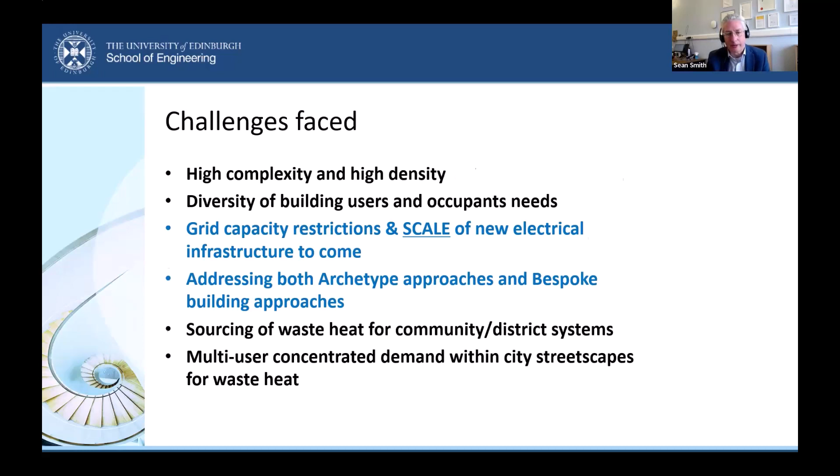There are further issues coming down the line in terms of the acceptance and accreditation of novel solutions. As we look at our buildings and estates, there are new types of fabric insulations and new heating technologies coming, and of course these have to be piloted first, but then they have to be accepted and accredited. So the timelines for those can also impact on how quickly we may wish to put in a new solution.

The historic and listed status of many buildings across the UK—none more so than the University of Edinburgh, which has 580 buildings, representing 25% of the entire Scottish university estate, of which 495 are heated buildings and 170 are listed buildings. The retrofit investment finance, which has been in big discussion over the last 18 months to deliver these works, is still ongoing.

It'll be interesting to see how pension funds and others move forward as they invest into long-term financial models on retrofit. But we're all coupled with the same issue of the pace of CO2 reductions and our skills capacity to engage for mass retrofit delivery. I'm going to touch on that today.

So let's look at London, Edinburgh and Glasgow, three amazing cities. When we look at flatted buildings alone, London is 54%, Edinburgh 68%, and Glasgow leads the UK with the greatest proportion of flats of any city at 73%. That's when you take into account the UK average, which is roughly 21% for flats.

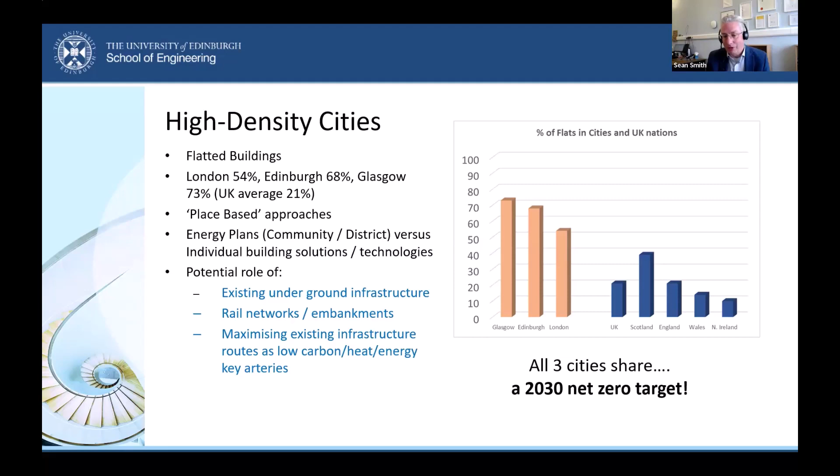And all three cities share a 2030 net zero target. So Edinburgh, Glasgow and London are sharing that very, very difficult timeline. A few months ago, back in November, I was presenting at the International Retrofit Conference, discussing the timelines both for Scotland's 2045 net zero and the UK and European 2050 net zero targets.

We often think, well, it's 22, 21 years away, we have plenty of time to 2045, or it's 27, 26 years away till 2050. And that might lead us, if we take the UK context, to think, oh, we've got plenty of time. But that's 236,700 hours roughly of work time since November of last year till November 2050.

But of course, you take away the weekends, the Friday afternoons when the construction industry doesn't work, and also the holidays, Christmas periods and everything else, and before you know it, you're down to 137,000 hours.

But then, of course, we don't work 24 hours a day. We typically work about 8 hours. Even if we take a typical 10-hour working day, with 1 hour traveling in, 8 hours work, 1 hour back, we're left with about 45,302 hours, which isn't a lot of time, equivalent to about 62 months.

But if we look at the timelines for 2030 for London, Edinburgh and Glasgow, we actually only have, if you accumulate real time available, about 1,377 days or 33,000 hours, and that's on a 24-hour clock. In reality, we have 11,000 hours by 2030, which if you packed them all together is only 459 days of full-time activity.

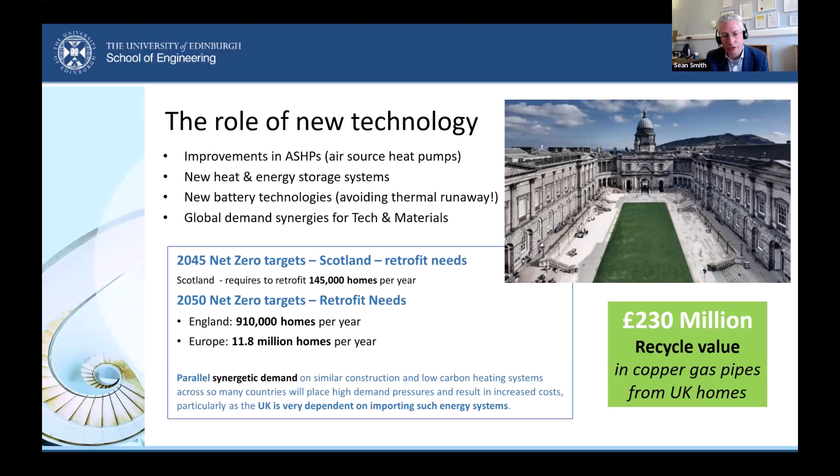There are some new technologies coming. These can be applied both to houses and to non-domestic buildings, and they can be stacked and racked. One of them is a British UK innovation called Heat Wayv, and the world's first trials of this will be coming out very soon. We'll be involved with those trials along with some other universities. It has multiple advantages over many other systems on the market.

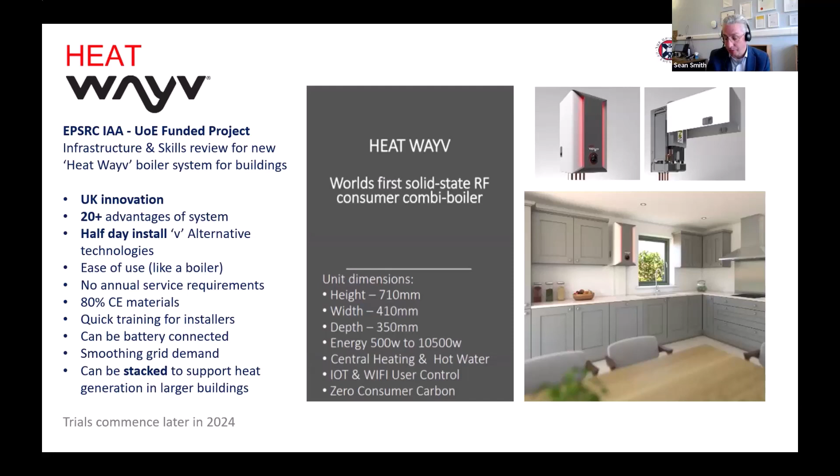It's only a half-day install. It doesn't require fabric first treatment, unlike air source heat pumps, which typically take about 4 days to install. It's very quick, with installer training available. Importantly, because you can link it with battery connections, it can help smooth grid demand—you can draw down electricity at night, which is far cheaper, and then it operates just like a normal boiler system during the day. This is a British company, and these will be coming very soon.

When we look beyond just our existing buildings, the other aspect to consider is what we're doing with any new buildings. So here we've put ourselves to the test at the University of Edinburgh, where we're building a brand new School of Engineering building.

Whilst the original conceptual designs were brought out in 2017, in 2020 and 2022 we then revamped the design to look at how we could reduce the type of materials we were using and reduce the embodied carbon—that's how much carbon was involved in the manufacture of those materials.

Importantly, what we decided to do is recognize that there are still new technologies to come for heating and also cooling. So we've built a net zero laboratory space as the building is being built live, where adjacent to the main plant room will be a space where we can test new technologies, and when the timing is right, we'll be able to switch and bring in new technology into that plant room, connecting directly to the building from that net zero laboratory.

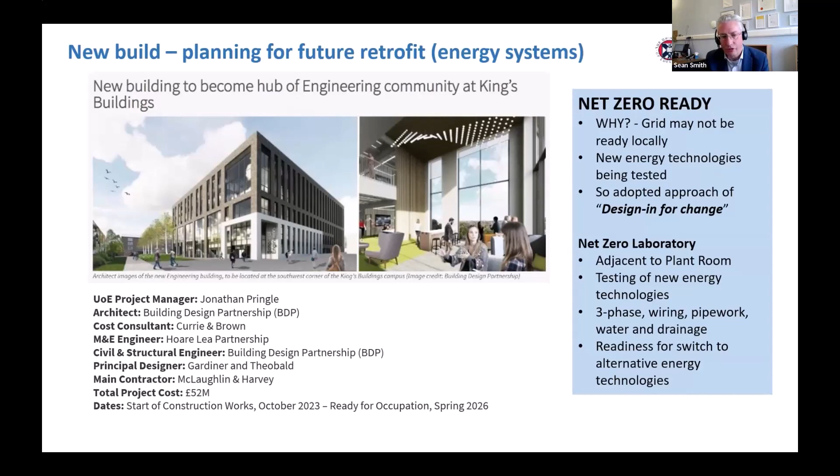So in essence, we are trying to plan for future retrofit by creating a design for change in this new building. There's a big discussion that often goes on around energy efficiency fabric, that's the thermal performance of the envelope of the building, and the amount of energy and carbon we're utilizing to actually manufacture these materials. As a result, air source heat pumps are relying more heavily on such fabric improvements.

There are new air source heat pumps coming for flatted buildings, which are going to be trialed in the UK very, very soon. But there is, we think, greater work that needs to be done on the potential sweet spot where you can limit the amount of fabric or envelope improvements you're making to your building, but still deliver the air source heat pump performance.

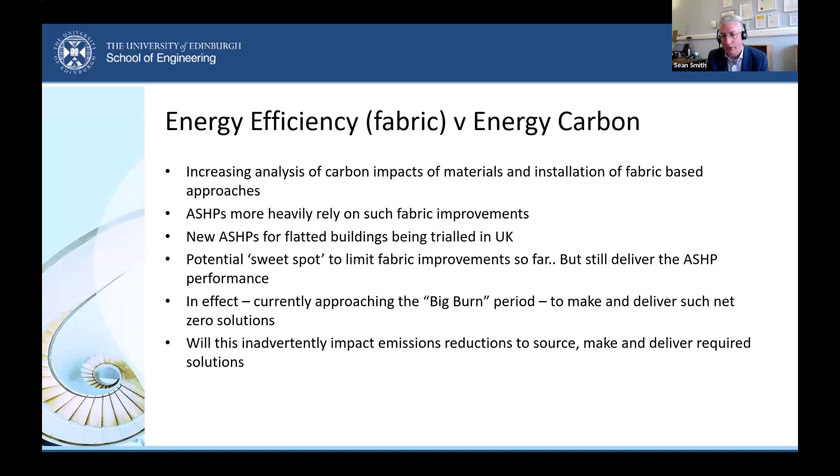If we don't take such measures and approach it in such a way, the likelihood is we will be on a big burn period, as I describe it. Our electricity is predominantly not renewable, there's still a lot of gas and other aspects utilized to create our electricity. So to make all these products and everything else, we're actually on a big burn to make them before we install them. Could that actually be counterproductive to the targets of where we're going? Some really complex issues for us all to consider.

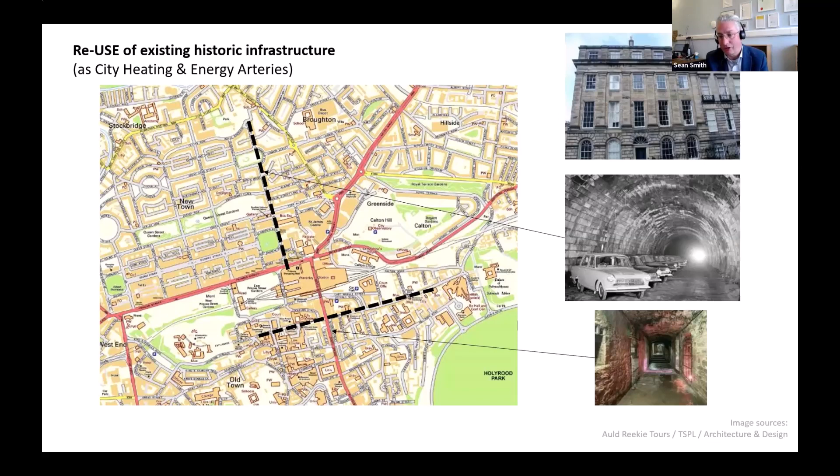And similarly, underneath the old town, there are tunnels which also haven't been used, which could be utilised and save us digging up roads and other things.

I've stolen this image from the ICE, the Institution of Civil Engineers website, but again, we've talked about, and other people have looked at, the ability to use waste heat from sewers. But not just that, perhaps there's an opportunity to also use the major sewer pipes, elements of them, where we can actually integrate district and community heating pipe networks into them, again without digging up the ground, and again accelerating that delivery of low carbon heat and network installation.

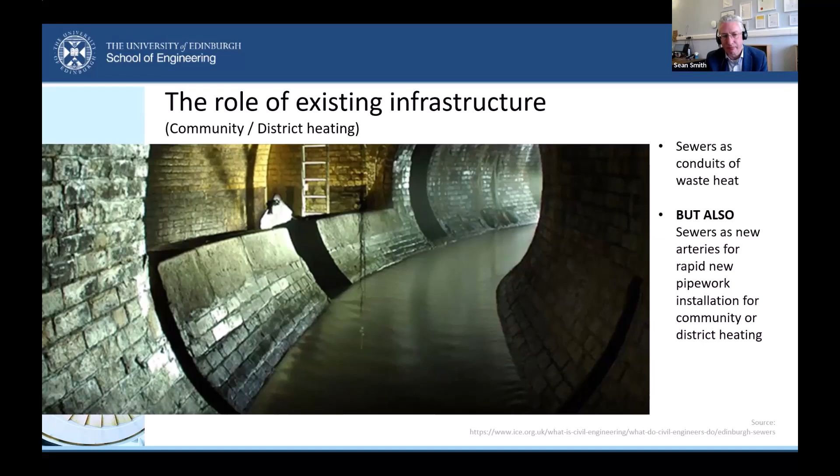I just want to finish off, if I may, on skills before I hand over to Julio. First of all, London, like the southeast of Scotland, faces major issues. It's a very fast-growing region, like London is, with population and other things. In the southeast of Scotland, we have a huge amount of workforce that we need. So when we're looking at how we're going to deliver the scale of demand that's coming, both in retrofit and net zero delivery, we worked with our local colleges to map out all current supplies of skills.

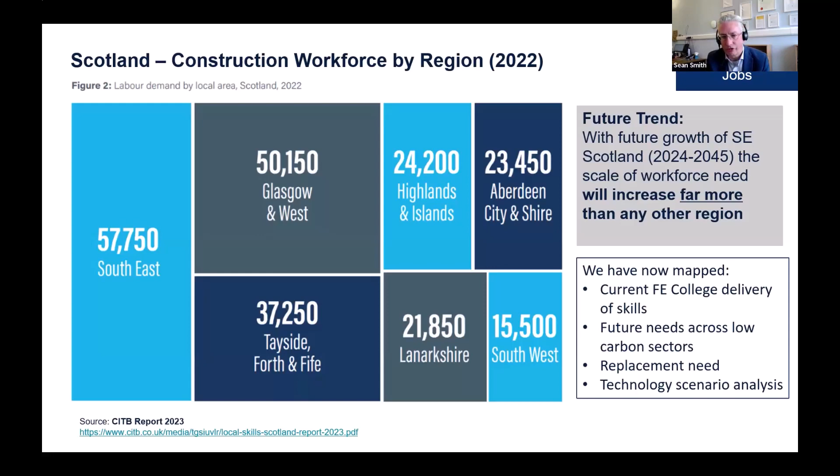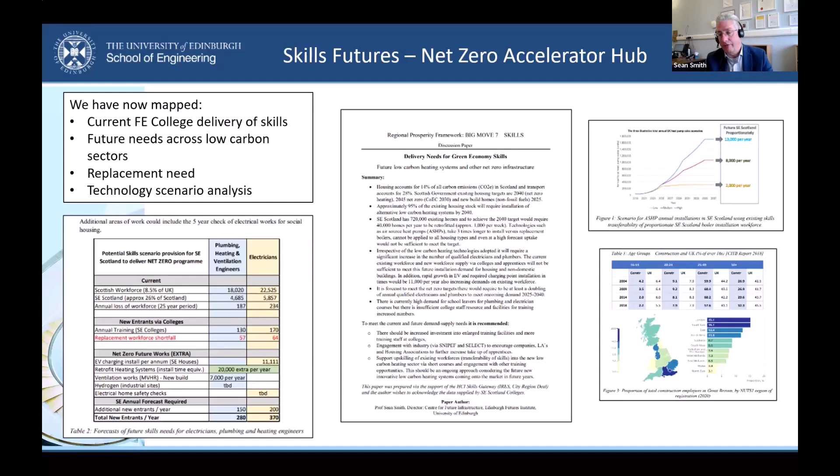What are the future needs we're going to need across the low carbon sectors on skills and workforce delivery? What is the replacement need also, as people are retiring, and running that, looking at one or two or three different technology scenarios for skills and what we would need. When we did that, it was a fascinating journey, looking at the propensity of what we would need to do. And this then formed a focus for the southeast of Scotland, and I'm sure London is doing the same, of looking at the formation of a net zero accelerator hub.

We are drawing and need the skills surrounding us. But the issue is that these other local authorities and regions, as they develop net zero, will also require to deliver their own works, and as a result will use their own workforce. So we need to replace it.

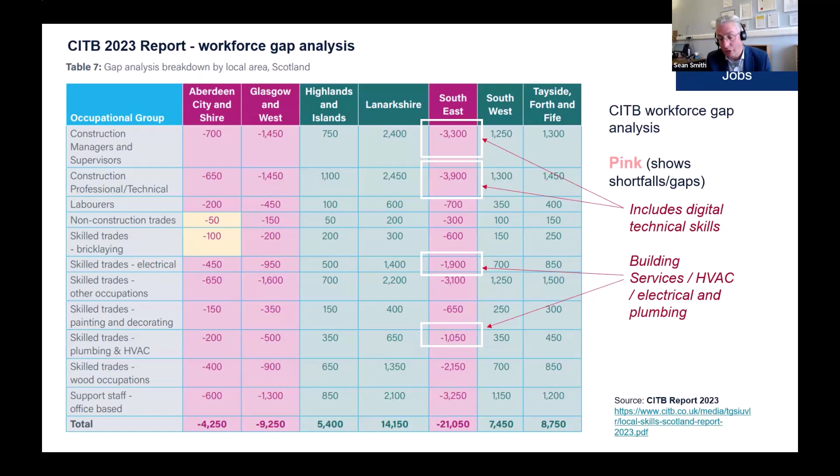That led to the formation of this proposal to have an integrated net zero accelerator hub of new investment for new training facilities, linking our four regional colleges, to drive forward that push on skills.

Just finally, we've produced a research bid recently, and we can keep you informed. This is to look at net zero high density buildings. We'll find out in June or July if that funding comes through, but we hope the solutions that come from this new centre for net zero high density buildings would be shared across the whole of the UK.

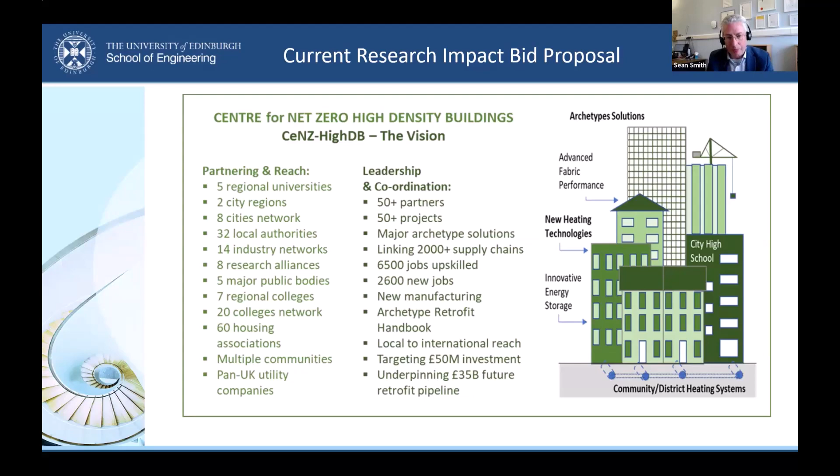Thank you, Sean, for that. It's really set the tone for some of the slides I'll be presenting, looking at the practical and technical methods we've been exploring here at the university and with other stakeholders across Scotland and other areas down south, through discussions on accelerating the delivery of this work and how we practically and technically achieve reaching net zero carbon potential and building performance.

Looking at that technical approach, we've been identifying building archetypes as the vehicle to bring that aspect around buildings, and how we actually reduce the demand of energy and reach some of the carbon targets that have been set for them.

There's great potential for using and applying building typologies. This has been done in other practice, looking at grouping architectural styles of buildings, their intended use, and age, to recognize how they operate or recognize other solutions. That's a similar approach we're taking forward.

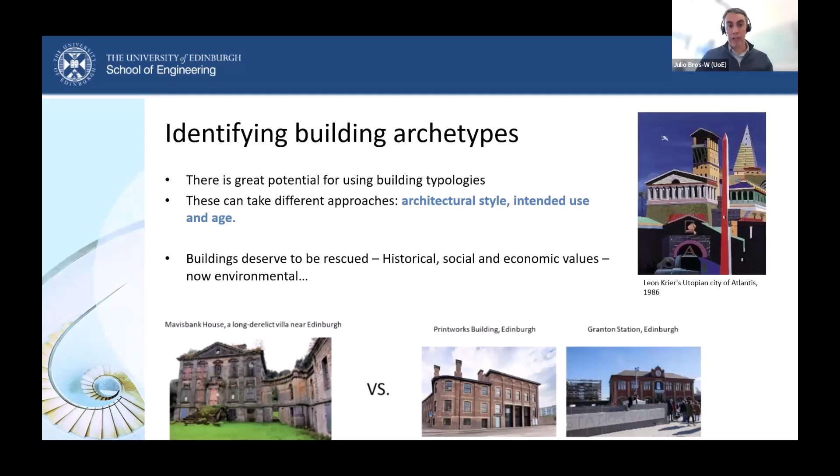We've got lots of buildings in that transition phase between being rescued and reused. Here in Edinburgh, the old Royal High School has been lying vacant, with many proposals rejected over the years, but there's a lot of historical value there. The same goes for Egyptian Halls in Glasgow, very prominent architectural features that have also not been put to adequate use.

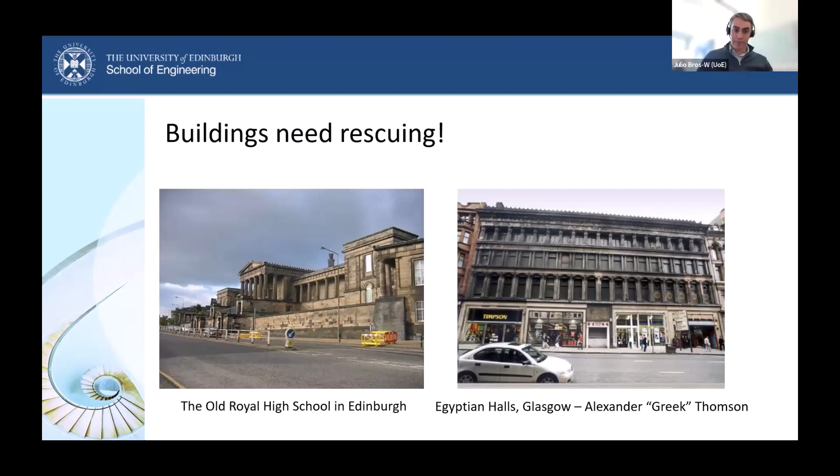Many buildings across the country in our cities are in this situation. Some have been rescued, luckily, and saved from demolition. A recent example here in Edinburgh is the old Royal Infirmary, now our new Edinburgh Futures Institute building, part of the university in the city, transitioned from an abandoned and derelict state to a fully functional educational building.

The same goes for our Edinburgh Climate Change Institute, which has gone through a host of retrofits and reuses, trying to stop and rescue these buildings from demolition, a fate that has been quite imminent for a lot of our buildings and towns.

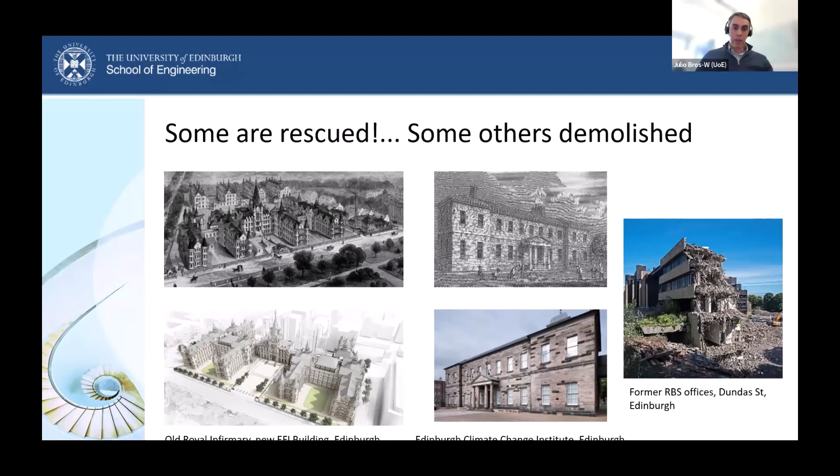So some of our current thinking and work has been turning around categorizing and coming up with ways in which we can technically deliver the improvement of buildings, trying to rescue them through that way. One approach has been to adopt an archetype approach, where we're looking at delivering retrofit through clustering and grouping building types, which can't always be captured fully, but we feel that's a method to take forward.

Categorizing previously has been done, certainly in a domestic and non-domestic way of buildings, through the building configuration - for example, having archetypes through the types of building, whether they're detached, semi-detached, flatted, etc., and also based on its building use, whether commercial, industrial uses, etc.

So that's kind of a grander scale approach, and we're trying to look at different commonalities in building solutions, looking at ways in which there can be shared knowledge and shared methods of retrofit through a simplified shared solution. We feel that the method of construction way of archetype distinctions is a way forward, where we can have some shared commonalities in ways we can implement retrofit and reduce energy wastage.

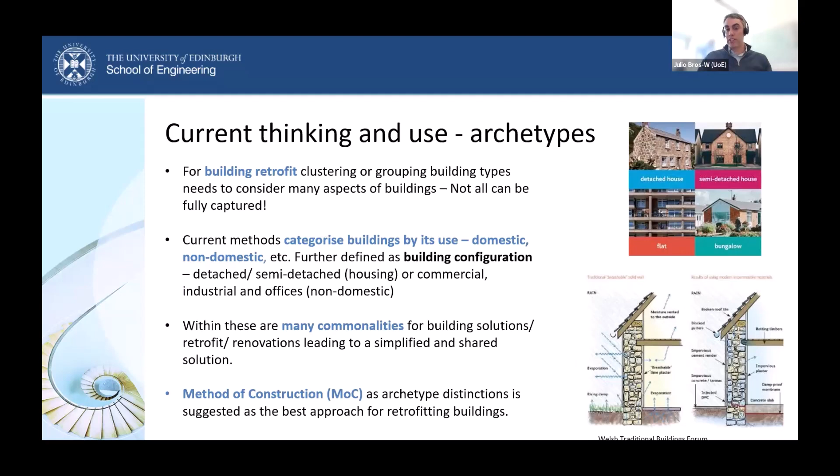So it's really looking at that, expanding at different building uses. It's looking at these subcategories and categories that could be arising. Some of the current methods are looking at the construction types, primarily the wall method of construction, as that trigger to giving us information on how they perform and also how we can improve them, thermally speaking.

And we know that a lot of our existing buildings can be categorized in different wall types, from solid stone to cavity brick to timber examples. Certainly some regions will have more prominent building types and methods than others, but they could definitely be clustered around.

And this can pave the way also to delivering low carbon heating measures, also meeting some of the energy performance certificate bands and improving these, and certainly reaching out to some of the net zero performance targets. So we're proposing looking at the archetypes in these different methods of construction.

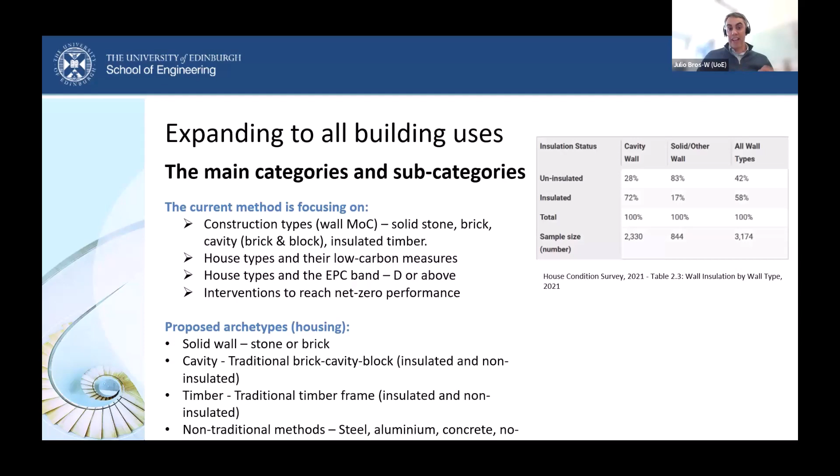But certainly looking at what's been done before in terms of insulation as being one of the steps forward in improving the thermal performance. In Scotland, we've got, through the House Condition Survey, a whole range of data that gives us more information on what's been insulated, what hasn't, and that's given us some indicators of what needs to be done.

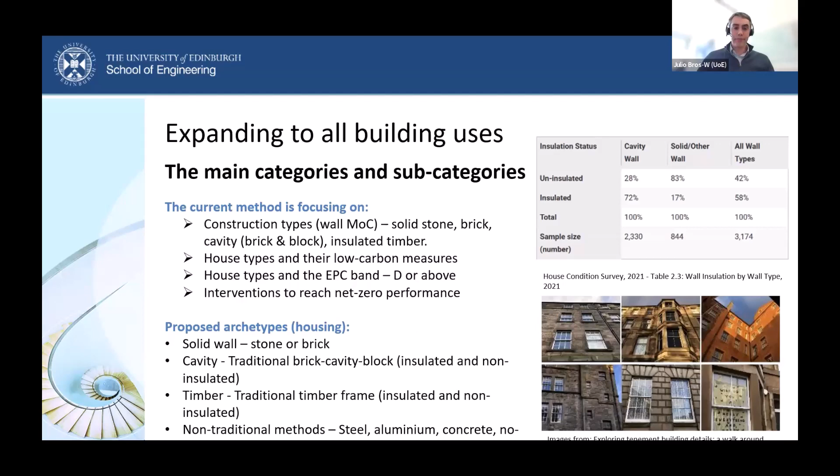And of course, some of the difficulties we do have is the wide variety of different subcategories of even the same building, but we feel that the method of construction can narrow these down to deliver the technical solutions for retrofit.

So expanding on this a bit further, the method of construction - there's a lot of shared knowledge that could be brought in terms of whether they are domestic or non-domestic wall types, because we know that there are non-domestic buildings that have adopted similar methods of construction as domestic, so we can have some shared knowledge and definitely some shared indicators of how that can be delivered by building owners, estate managers, etc.

There are other components that will be around for questioning, and solutions need to come in - for example, for floors, for different window configurations, for the roofs, etc. But there are some equal solutions that could be shared amongst these, as long as they're very clearly identified and delivered in a design and also performance way.

So facilitating bulk retrofits is a way that we're trying to bring in the use of archetypes, understanding that there are these commonalities between them and that the solutions could be shared and added at a larger scale. And certainly trying to look at the low-hanging fruit in a lot of these, and the building archetypes can definitely provide that.

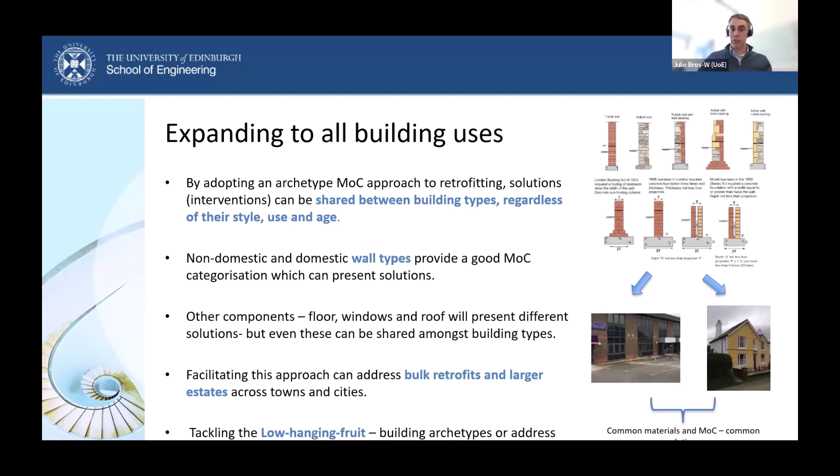Separating maybe some of the easier retrofits and building methods of construction that could be upgraded easily, and also isolating and looking at ways in which these harder to treat or harder to retrofit buildings can also be detailed in a better way.

We've been doing this not just with the building envelope - the walls, the floors, etc. - but equally we've been trying to do this through the low carbon heating delivery and the needs that this can present to buildings, which can be quite varied in some circumstances. But again, there's shared knowledge there that similar building types and archetypes can be replicated in other building types.

We've been working very strongly with Scottish Power and SP Energy Networks, where they're trying to look at the technology out there and preparing a series of pattern books together with our envelope archetype solutions that could be assigned to these different building types and can easily be rolled out and can easily technically be assessed. So there's ways in which the retrofit can be rolled out in this way.

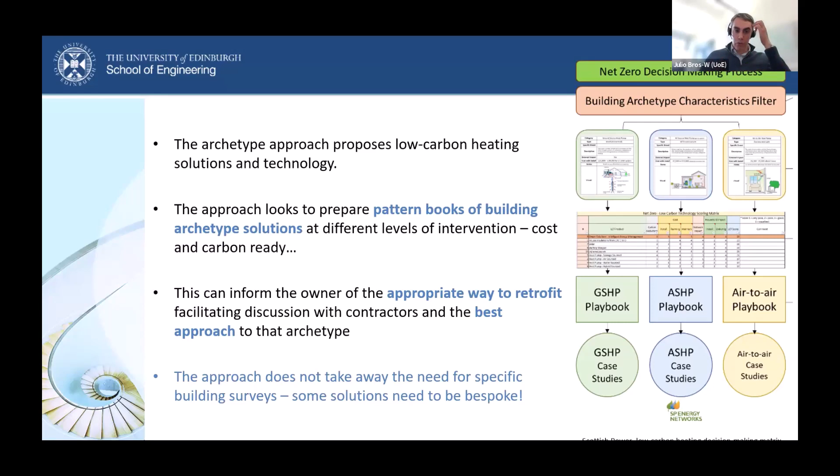We know that some of the buildings need specific building surveys. That doesn't negate the need for these, but understanding that there is a lot of commonalities that could be replicated, and that's where the work is kind of centered around.

To gather a lot of the understanding of this, we organised last year a series of workshops addressing domestic, non-domestic and historic buildings, looking at all the issues and challenges presented by building estate owners, individual building owners, and homeowners, to really understand what complexities there might be, what differences there might be between the different building types. This was a very interesting way of discussing some of the solutions moving forward.

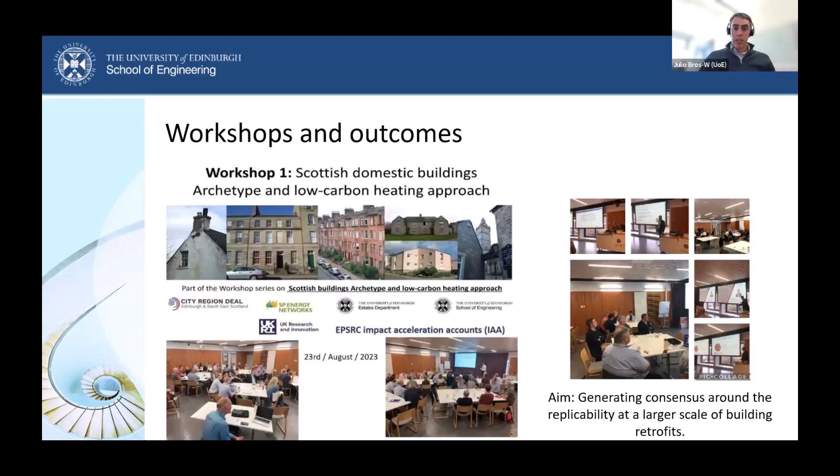We had a very successful set of workshops, over 160 participants from different groups, from local and central governments, some architects, engineers, but very interesting from the general public as well, with that interest saying, well, how can I actually retrofit my building or my home to do this in a more efficient and informed way?

We produced a summary paper, which once these slides are shared, hopefully you've got access to the link where we host this, where we gather a lot of the thoughts and discussions from the stakeholders. That could be a good read for yourselves to take and apply it to your own stock or your own buildings.

It came up with three key recommendations: looking at implementing robust systems and coded archetypes, creating a publicly accessible pattern book and guides for different archetypes for people to roll out and understand how to retrofit their buildings, and something Professor Smith has been developing as well, looking at that UK national building database, where we can integrate archetypes to get a shared knowledge of how buildings are built and what types of buildings we have across the UK.

Applying these archetypes can be very easily transferable over to non-domestic buildings, as I mentioned. There are a lot of commonalities there. In previous iterations, a lot of the energy performance on non-domestic buildings was very ropey, it wasn't very clear, and therefore there weren't any specific needs for building owners to accommodate themselves within the targets. But it's getting much more stringent.

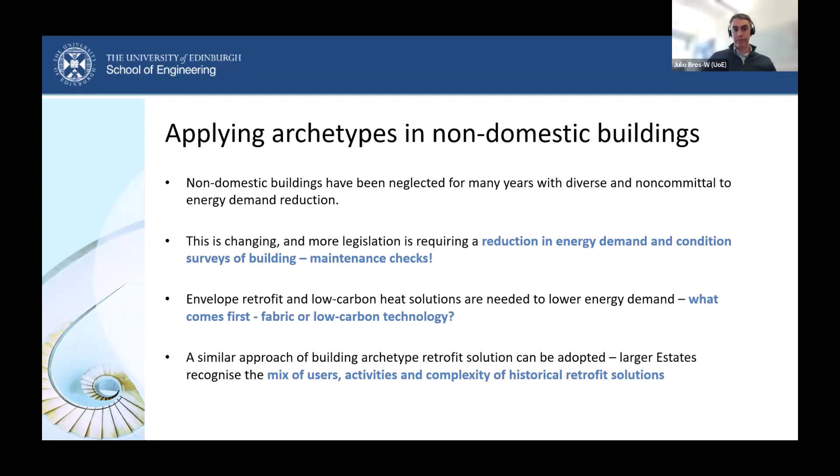So just a bit of a flavour on some of the work that we're doing here with larger non-domestic buildings at the University of Edinburgh campuses. Professor Smith has explained the extent of our campuses across the city of Edinburgh, specifically looking at surveys and categorising all the building types that we have across the campuses.

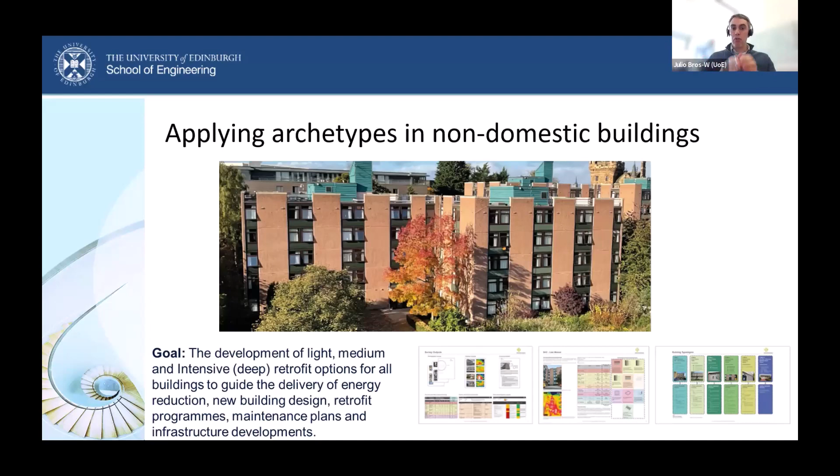We look at ways in which we can survey a cluster of them, understand how they currently perform, and come up with different ways in which various components can be retrofitted and improved thermally. For example, walls as a primary example, but then also looking at windows and other openings, flat roofs, which pose quite large problems, and coming up with different solutions suitable for that specific archetype. We'll be sharing some of the slides on that.

But I think something that really resonates across the campuses that we have and other stakeholders is the way that we scale this up.

We typically start with a building level assessment, where we look at individual buildings. We understand the complexities of one building on its own. But in reality, we need to be thinking across the way into larger data sets, larger buildings that connect with each other.

The campus level approach is a primary example, where we look at a scaled retrofit approach. We're looking at master planning, looking at that diversity of the estate. But also it links into the city level, where it can be linked to other stakeholders like the NHS, other users and other large estates around cities, where there can be shared knowledge around the delivery of envelope performance and retrofit, but also low carbon heating solutions like networked heating between communities or district heating solutions.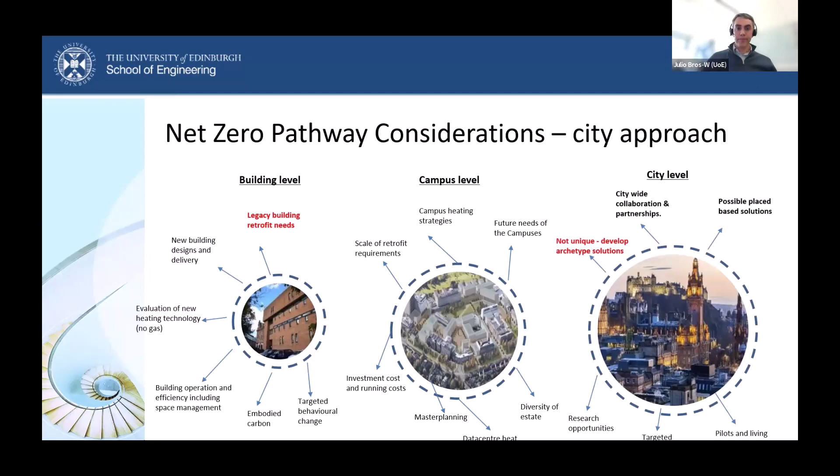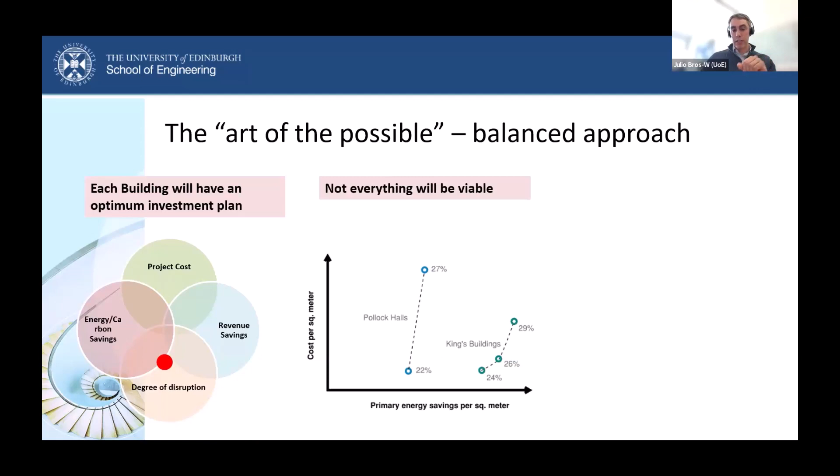And just to finalize here, I think it's very much around the art of the possible in a lot of the solutions we come across, certainly around non-domestic occupied buildings, where we're trying to balance the costing, the carbon and energy savings, and also some of the disruption that might arise. It's really about identifying that sweet spot where it could be suitable at different points. It's not always about energy savings - it's also about cost and that balance, plus other challenges like climate strategies, risk around occupancy, and trying to find funding.

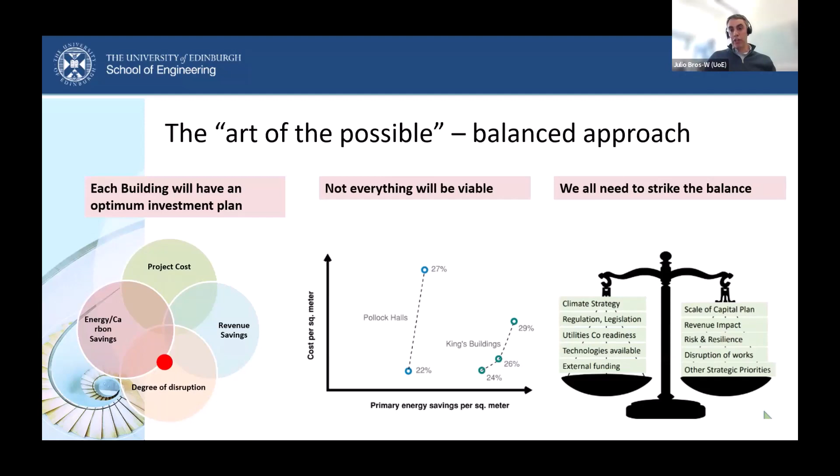So that's important. Just to conclude and move on to discussion - certainly, archetypes are not your only solution. It's not a one-size-fits-all approach. It's certainly one way of looking at building retrofit, but looking at that commonality and ways in which it can be rolled out, the archetype solution can be a good guide to do that.

There are building limitations regardless of all the similar archetypes, and certainly doing specific surveys on specific areas of certain buildings - some of which are very bespoke with key features - is something that should be looked at. Something Professor Smith also touched on is that strategic national approach, looking at peak demand through storage of energy.

Also, behavioural changes around the occupants of these buildings is key, and striking that balance between the cost of fabric first, looking at envelope performance, but also the reduction of energy consumption and upgrading where we link into existing energy networks. And that risk of what comes first - is it fabric first, or network capacity? Is it going to be a race to hooking up to that low carbon electrical grid being rolled out throughout the UK?

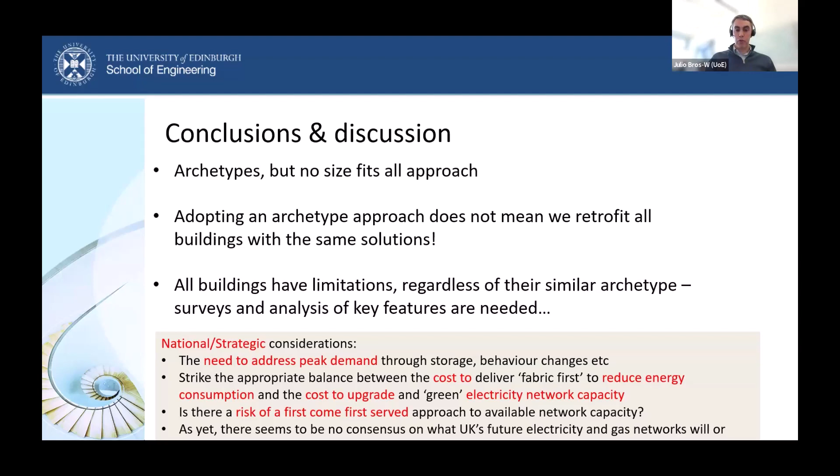For those of you who deal with larger estates, and maybe smaller estates as well, this could be a good action stage approach for assessing your stock and looking at ways you can apply the archetype approach. I'd certainly ask people to determine the method of construction and place it within our archetype that's predominant around your estate, identifying variations and subsets and areas that need more attention and survey. But equally, look at benchmarking that archetype and ways other data can give indication of performance, understanding net zero potential, and how a pattern book can be adopted to show best practice and guidance.

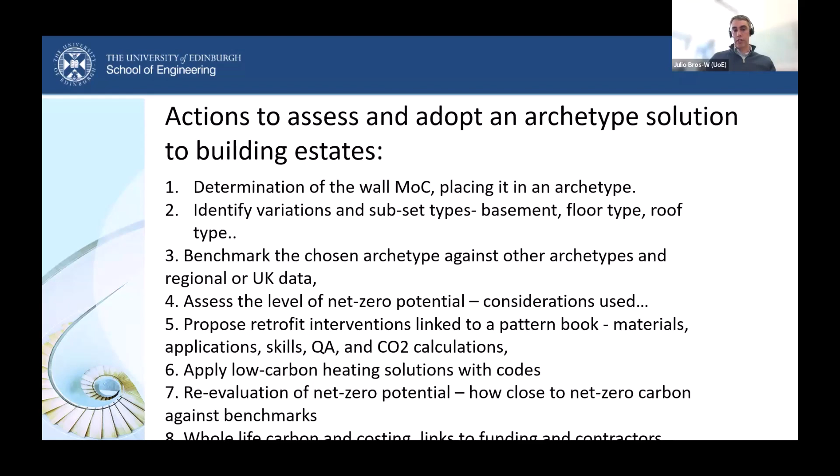Applying a similar approach to low carbon heating and solutions, and also re-evaluation and looking at ways the design of these retrofit solutions can be assessed, and looking into whole life carbon and costing also as an option. We're open for any questions.

Absolutely, thank you very much indeed. And Sean, of course - I'd like to kick off with a question using Chairman's prerogative, and that is: the principle of archetypes, generic solutions, pattern book solutions, seems so self-evidently a good idea. Has there been any quantification of the time that would be saved nationally, coming back to Sean's introductory comments about how much time we've got left? Have you been able to make a reasonable assessment of time saved if archetypes as a principle were adopted as a key platform for delivering net zero? And a follow-on from that - what are the blockers to being able to deploy this on a large scale?

We've been here before, folks, and England took the world lead. Back in 2002, 2003, a pattern book was developed for Part E of the building regulations, which I led. That's a completely different area to do with sound insulation, and that was where new house building wanted to build.

They all wanted to make a step change, an improvement and enhancement of performance, but they needed to know how to get there. So from a series of testing and pulling in data from all sorts of sources, we were able to produce the start of a pattern handbook called Robust Details. I still serve on Robust Details as technical advisor, and it's now created 400 combinations that architects can choose.